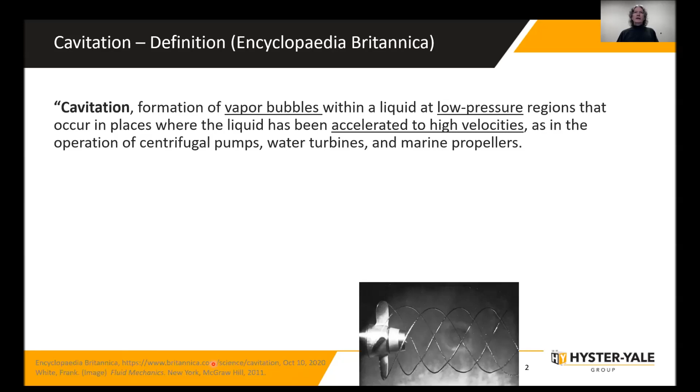So cavitation frequently gets a bad rap. Sometimes that's deserved, but a lot of times it's not. In fact, if we look at the complete definition from Encyclopedia Britannica, they come out directly and say it is undesirable because it produces extensive erosion of the rotating blades. It creates noise, vibration, reduction in performance, and it can do that. But to just say it's undesirable in general seems a little harsh to me. So in this presentation, I hope to show you some of those undesirable things, but also where it can be really fascinating. And sometimes even life depends on it.

This is an important sentence here. Cavitation forms when the pressure of the liquid has been reduced to its vapor pressure, typically isothermally. So I'm not going to go into the whole definition. You can look it up. It is Encyclopedia Britannica, and I really don't like that they state that, but they do.

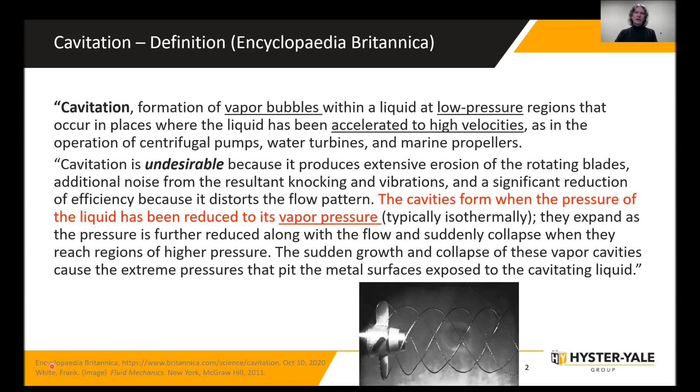So vapor pressure. I'm going to use water frequently in this presentation because, well, we all know what water is and we deal with it every day. So to create a vapor bubble, there are a couple different ways of doing it. And basically what you have to do is you have to cross this line here. And you can see it's dependent on temperature. So if you're above this line in this white area, you have a liquid. And as soon as you cross over into this gray area, you turn into a gas. And then as soon as you travel back across that line, increase the pressure, it turns back into a liquid. So there are a couple ways of doing that.

Just a couple background things here. As a reference point, all of my pressures here tonight are probably going to be in absolute pressure. The pressure that's surrounding us in PSI would be 14.7 PSI, but we're at 101 kilopascals, which is located here. That's all that air that's pushing down on us at sea level. And as another reference point, if we were to drive up to like 6,000 feet, to Timberline Lodge on Mount Hood, we have a lot less air. We have 6,000 feet less air, and the atmospheric pressure drops to about 80 kilopascals. Just kind of as a reference point, and some of that will come up a little bit later as well.

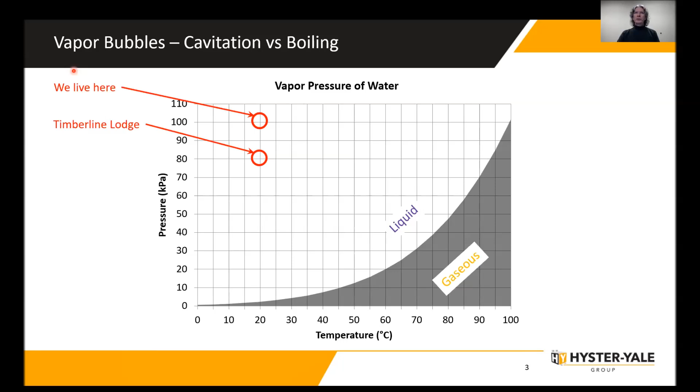So a vapor bubble is when you turn from a liquid to a gas, and there are two ways of doing that, one with cavitation, the other with boiling. And either way, you end up with a vapor bubble. So the most common way, and I think everybody knows how to do this, if we want to boil water and get a vapor bubble, we take our pot of water here and we start elevating the temperature, and we just keep adding more and more energy to it. The heat rises until you get to this 212 Fahrenheit or 100 degrees C.

As soon as you cross over that line, you get a bubble, and that's that steam bubble that rises up through the liquid. It reaches the top, it pops, it then cools off in the air, it turns into a vapor in a large area, and you have all these little particles. That's the stuff you can see. You can't actually see the vapor bubble itself. You can't see steam. Steam is invisible. But what you see rising up is the condensed version of that, condensed in the air, kind of like a cloud. So again, if you were up at Timberline Lodge, you would boil your water at about 93, 94 degrees Celsius. So that's how you can create a vapor bubble with boiling water.

But what we're going to do in cavitation is we're not going to add heat. We're going to decrease the pressure. And we have to, from wherever we're starting, decrease it all the way down to that line and cross over that line. And what happens when you cross back is that vapor bubble collapses. Unlike the boiling water, where it travels up through really hot water, that vapor bubble can stay and then be exposed to the air. Here we're in a cool liquid, so as soon as we come across, that vapor bubble will collapse.

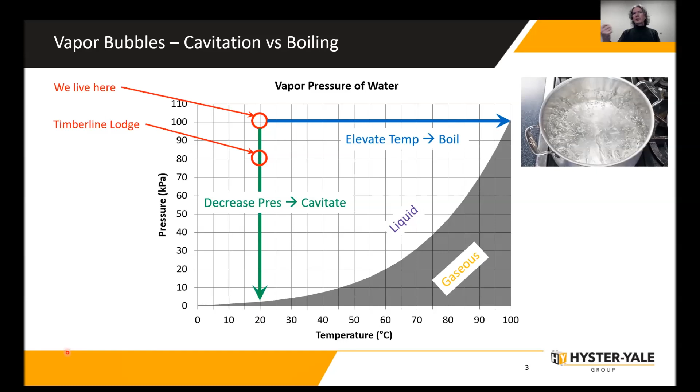What happens if, let's say, we're out here at 60 kilopascals and 60 degrees C? If we raise the temperature, I'd call it boiling. If you lower the pressure, I'd call it cavitating. If you were doing both, I'd say you're trying to split hairs. It really doesn't matter. You're creating a vapor bubble. It doesn't matter which way you get to it. But typically with boiling, you're adding heat, and with cavitating, you're decreasing the pressure.

This is just a funny little thing. This is a Mr. Bean cartoon. So he's making a pasta dinner. These are not his words. These are my words. And I found back in my single days when I was dating, people who said things like this really didn't get very many second dates. And I happened to have a young woman over one night who was a food scientist. And I made this comment because we were having pasta for dinner, and she rolled her eyes up into the back of her head. And I kind of thought, well, there goes that.

You know, that date's not going to last very long. But she stayed. We finished our dinner. We went and we had dessert. I'm a big ice cream fan. I think anybody in my family will agree with that.

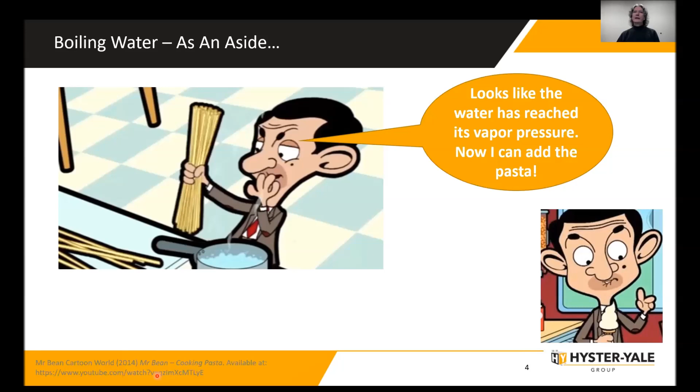And so we get the ice cream out. And as we start the ice cream, this young food scientist came back with, don't eat that too fast or you might get sphenopalatine ganglio something or other. This is the technical term for a brain freeze or an ice cream headache. So I kind of knew I met my match. And it wasn't very long after that we got married.

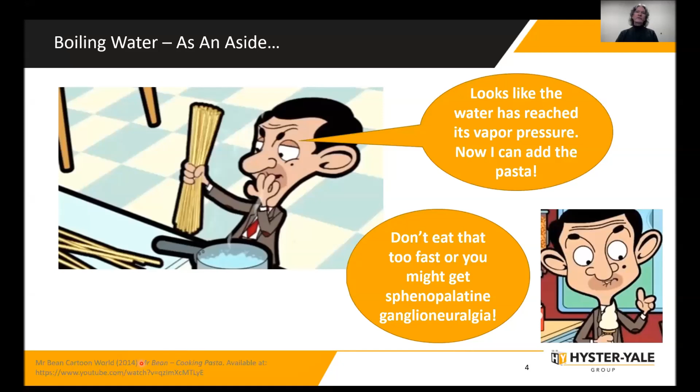So a little bit of history, some great names in cavitation, and I'm really just going to focus on some of the early ones and some of the big predominant people. Mr. Torricelli, he was working for Galileo, and they were working on suction pumps. And this is the same Galileo that was looking up at the stars. Quite the Renaissance person back then.

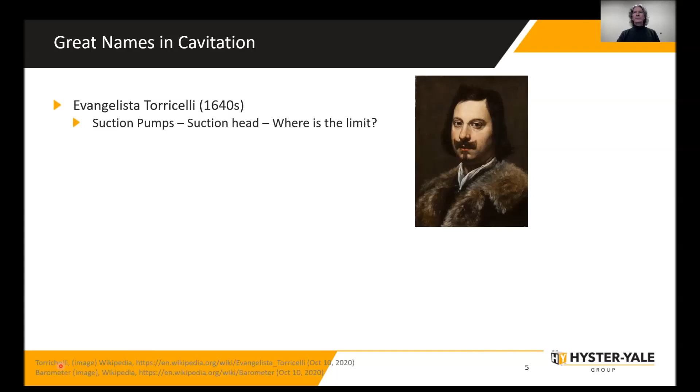So they were trying to develop these suction pumps and trying to figure out the suction head. So if you have your pump at one location, how much suction head, how far can you lift that water? And they were trying to find out what the limit was on that. So Torricelli came up with an experiment where he took a glass tube, he filled it with water, he capped it at one end, and he started raising it up on the outside of his house.

And he noticed the funny thing, at about 10.5 meters high, something happened and a bubble appeared. And he didn't really know where that bubble came from. He kept raising the tube up higher and the bubble stayed at 10.5 meters high. And then he lowered it down. When he got below 10.5 meters, that bubble just disappeared. So he was really curious about what this bubble was. Where did it come from? Where did it go? That sort of thing. And he was doing some research on that.

And basically what he found, he didn't have terms for it back then, he found a non-inertial cavitation. So this is where you can cavitate things without using that high velocity. He didn't have any velocity at all, but he did have cavitation. So as he's doing his research on this glass tube on the outside of his house, he noticed that that 10.5 meters wasn't always consistent. He noticed that it started to fluctuate.

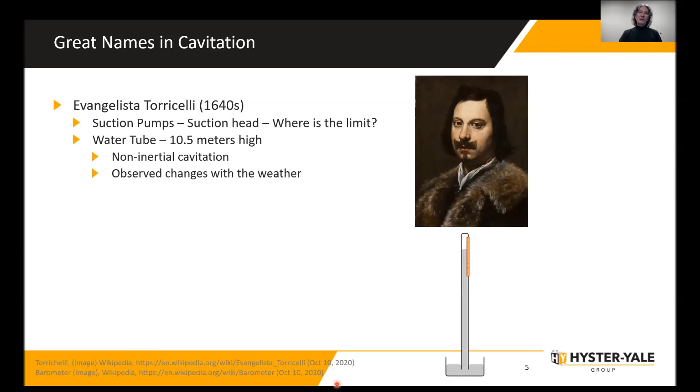And then as he's writing all his data down, he's noticing that it's starting to fluctuate based on the weather. And he could start to sort of predict what the weather was going to be for the day. And being the 1640s, if you're predicting the weather, it can really only mean one thing, and you must be a witch. So he started hearing rumors. He really didn't like the idea of what happened to witches in the 1640s. So smart guy, he quickly dismantled this thing and packed it all up and took it inside.

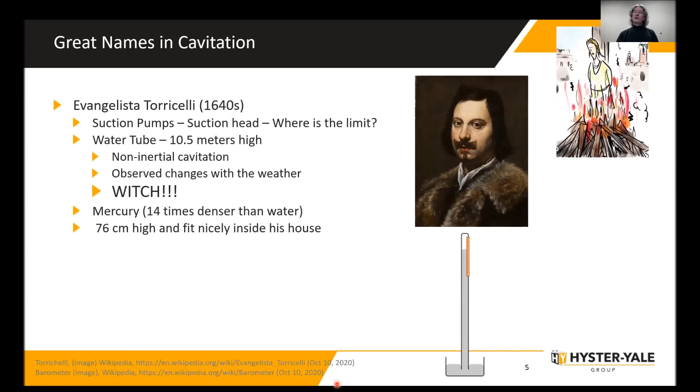But not to be dismayed, he continued on with his research, looked at mercury, and found that in less than a meter high, he could do the same thing with mercury because it's so dense. He could also do it in his house with his curtains closed so his nosy neighbors couldn't look in. And he essentially invented the first barometer. So this is a mercury barometer, for measuring the atmospheric pressure, and that's really what he was reading here and noticing in the changes in the weather.

And that has become the standard of reading atmospheric pressure for centuries, basically from the 1650s, really up until about 50 years ago. And it's still really kind of used today. This barometer that's shown here in the lower right is just the top portion of it. The rest is down below.

But this is one that my grandmother gave to me. She had it, and when I was young and visiting her, I was fascinated by all these little gradations on here. What does this mean? And how does this thing work? And what's it doing? And how do you measure things? And I was adjusting it every day to see how much of a change there was. And as she got older, she gifted it to me. So it was really nice to be able to get that from her. It's a nice fond memory. She was a very technical person, should have been an engineer, just had really bad timing.

So the kilopascals, the Pascal in here, Pascal was a friend of Torricelli. And they took this mercury barometer and started hiking around. I imagine they're hiking in the Alps because they're Italian and French, if I remember correctly. So I'm assuming they're hiking around the Alps, and they started measuring the atmospheric pressure based on elevation. So, similar to what I showed before with Timberline Lodge.

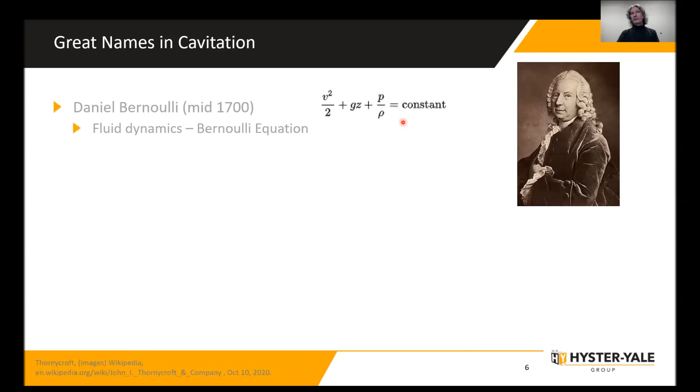He also had a friend, or at least an associate, Euler, who speculated about flow-induced cavitation. Now, he didn't actually achieve it, but he speculated. And my guess is that he was looking at Bernoulli's equation. He knows there's a constant on this side. We're dealing with water. The density doesn't change. This is a height and a gravitational constant. Those are both constants, so those don't change. So I have two variables. And based off of Torricelli, if I get down to the point where I can cavitate, I get the pressure low enough. To get that to drop, I need to increase my velocity.

So he did a lot of speculating. I never get credit for the speculating I do. I do a lot of speculation myself, but he gets credit for at least thinking about flow-induced cavitation. And we'll throw a little nod to Bernoulli.

The other thing I'll mention here is I really want to highlight that this is Daniel Bernoulli. The Bernoulli family was a very mathematical family. He had two brothers who were both in calculus, and I think one of them was in economics, but very tied to math. His father as well is somewhat famous, and I think he had a couple of uncles who also did things in other areas. So the Bernoullis were very influential.

The other thing, Daniel and his father entered a scientific contest in Paris. They entered it separately, and they tied for first place. They entered it in two different categories or something, but they tied for first place. Now, if I entered any kind of contest with my daughter, I'd be really ecstatic if we tied for first place. That'd be quite exciting for me. Daniel's father didn't really see it that way. He was actually quite ashamed that anybody would even compare his son to him, to the point where he never let Daniel into his house for the rest of his life. So a little bit of weird family dynamics there.

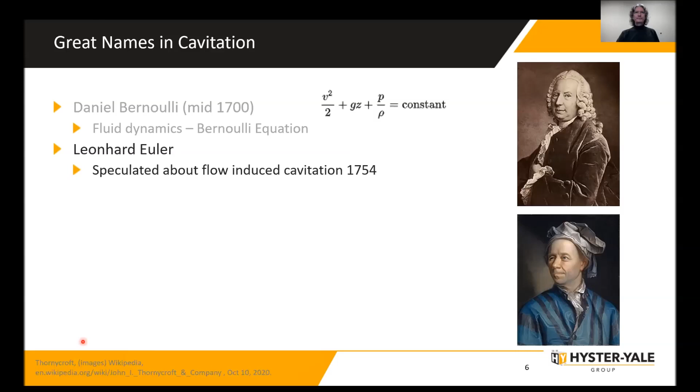So moving on a little while in time, we come up with John Thornycroft and Sydney Barnaby. Now, John Thornycroft owned a boat building and torpedo building company in England, and there's still some version of the company around today. His right-hand guy was Sydney Barnaby. Barnaby was his researcher, his designer, his engineer, and he was also a great writer. And in fact, you can still find his books on Amazon or at Powell's. So you can still find his writings today.

But what they were doing is they were trying to get their torpedoes and their ships to run faster. So they were looking at the propeller design. And they noticed on the back side of the propellers these little bubbles that were forming and collapsing. And they were kind of curious, as I was, what those were. And probably because of Barnaby's work, because he was the main research person behind it, he started looking into it more and more. And he's the one who created the term cavitation. And cavitation just meaning cavity and at intervals, because he saw these bubbles forming and then collapsing right away.

So there have been a lot of other people who have been influential in cavitation. These are just some of the early ones. A lot of it now is done in academia, not to discredit that. But again, just some of the early people that were involved in this.

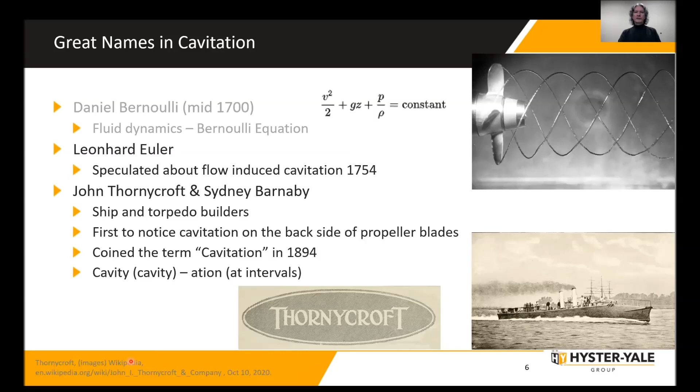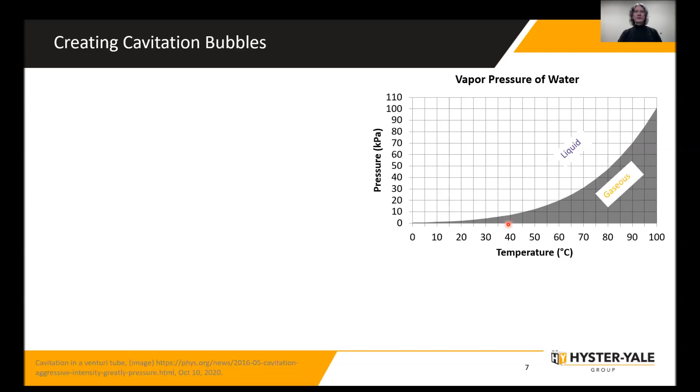So how do we create a vapor bubble, a cavitation bubble? Again, we need to drop the pressure to go below this line and turn into a gas. So what are some of the ways of doing that? We talked about Bernoulli before, and Euler was right. You increase the velocity to a point where your pressure just keeps going down farther and farther and farther, and you cross over that line and you create a vapor bubble.

Another way to do it is with a vortex. Now this is a bit of a combination. It is flow based, and you can use some of Bernoulli's equation there, but also as you have a vortex, things are spinning and they want to accelerate outward. And it creates a very low pressure in the center. That's even true in tornadoes. The center of tornadoes are incredibly low pressures.

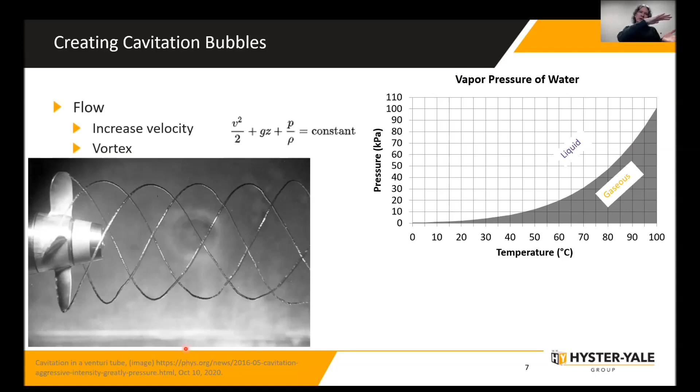So here's a picture. This is a very common picture that you'll find in fluid dynamics books. It's a very beautiful picture, at least to me, but it's also a very hard picture to create. This picture is created in a flow tunnel. So they actually have a very controlled flow rate of liquid coming at a really laminar flow across this area. The propeller is rotating, but it's stationary. And that allows them to really make sure they control the flow rate to just the right precise amount. It's also a specially designed propeller so that it kicks off a very large vortex.

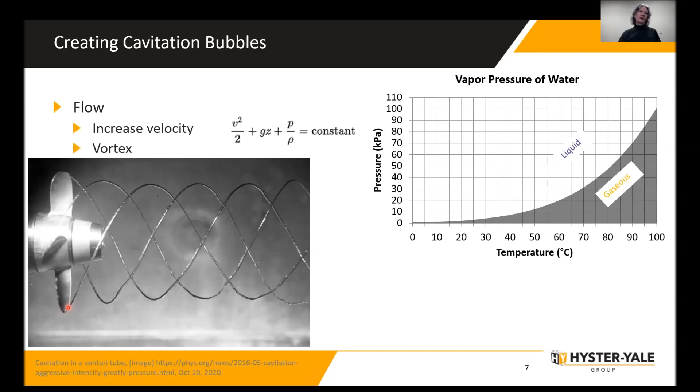What happens here is the vortex is created and it doesn't dissipate. Again, you see that in tornadoes. They take a long time to dissipate, and that's true with vortexes. So it takes a long time for that to dissipate, and they have set this up so that it starts to break up and the cavitation collapses somewhere after this film. But it is a very beautiful picture, but it's also not a very real world example. Typically, what Barnaby would find is the bubbles would form and collapse right in the area of the tip of the propeller.

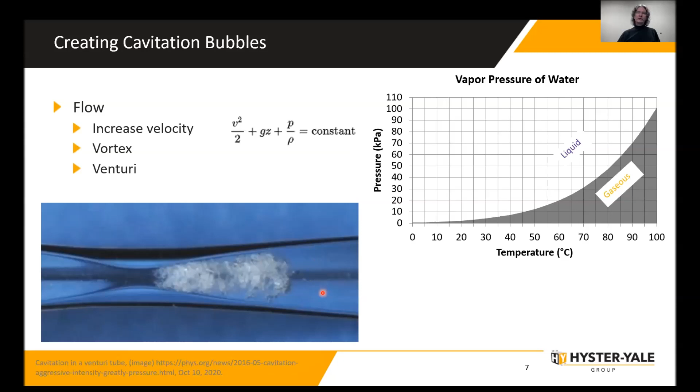Now you'll see it's a very small diameter here, and the bubbles are created, but you can see out here the diameter is actually still pretty large. And the reason is these bubbles are really taking up a lot of space. So even though it has increased to a large diameter, I've got all these little gas bubbles in here, which are just kind of clogging things up. That's some of the efficiency problems that we talked about earlier. But at a certain point, the pressures increase and you go back above the vapor pressure line, and then all the bubbles collapse, and you're back into the full liquid state.

So you can pull a vacuum, as in the barometer. You don't need flow, you just pull a vacuum, you keep lowering the pressure farther and farther as you go up. So a barometer is a good example there. Or you could combine a vacuum with flow. Again, if we were starting at atmospheric conditions, you see this is a very long way to go.

It's a large delta. So let's say we're sucking something into a pump, starting at atmospheric conditions, and we put a flow restriction in. Let's say we start throwing a whole bunch of things in the way. We throw in an orifice or a filter or sharp bends, things like that. It'll decrease the pressure coming into the pump. And now if I'm down in this area, the delta is much smaller, so you'd need a much smaller change in your velocity to the point where you can cavitate. So kind of a combination of things here.

The other one, heat. You can see by the curve, the higher the temperature, the easier it is to cavitate, the smaller that delta will be. If you had enough heat, we're just boiling the water. But yeah, if you go out to 80 degrees, then your delta is probably half of what that is at atmospheric conditions.

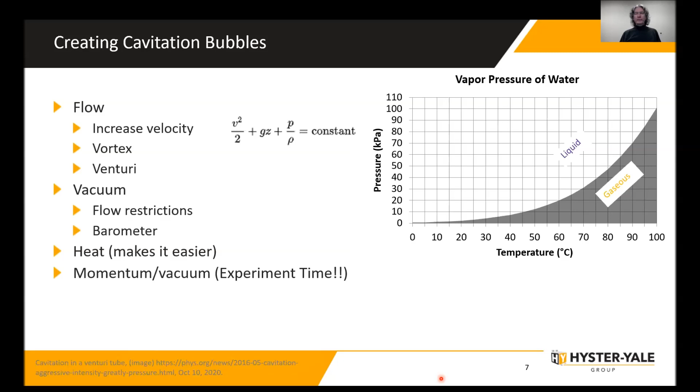Okay, momentum. Momentum's really vacuum, but it's really just a segue to an experiment that I've got. And what we have here is a cavitation tube. This is just a clear plastic tube. There's a plug at the bottom. It's filled with water. It's 4 feet high, and I'll cap the top eventually just so it doesn't spill out.

What I'm going to do with this tube, and I'll show you the experiment, and I've got a little video afterwards because it's actually kind of hard to see in the video or live. It's much better if you're in person because it happens so quickly. You may not see it because of web speeds and all things like that, but it's still pretty tricky to do. So what are some things that I can do to make it easier?

Again, we're going to start at this location because we're pretty close to sea level, and I'm at room temperature. So we've got to drop down all the way to roughly 2.6 kilopascal. So that's a long ways to go. So some things I can do, I can add heat to it. I could use hot water and I could have a much smaller delta. That would work, but I'm not going to use that.

I could get somebody with faster twitch muscles than me to really shake this thing up and pull it down quickly. But we're in COVID. I can't have anybody else come in to the office tonight. So it's just me.

I used to work in the paint industry. I happen to know methyl ethyl ketone, MEK, is at about 10 kilopascals, acetone's at about 25. So those would definitely benefit me. It would give me a smaller delta. Those are both really nasty chemicals, and I don't want to mess around with them, so I'm going to stick with water. The other thing I can do is add a vacuum, and that's actually what I'm going to do.

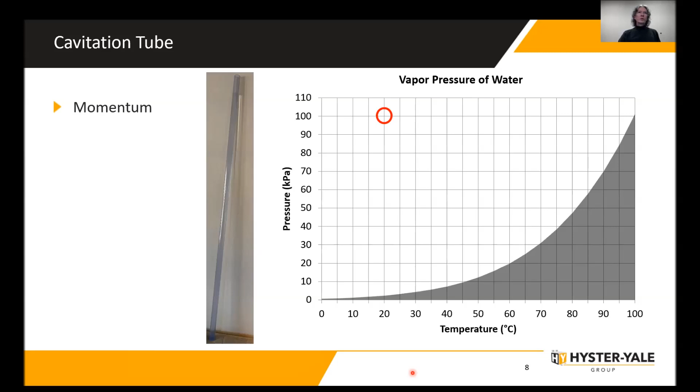So I'm going to take my little VacuVin here. This is just from one of those wine saver kits, and put it in the top. And what I found experimentally is I can drop the pressure to about 60 kPa. Okay, so I'm going to switch over here. Now you should just be able to see me. And I have my cavitation tube here and my little VacuVin. So I'll just go ahead and pull the air out of that.

You can see there's water to the top, and this is a fairly long stick. It's 4 feet long. There's a little plug at the bottom there. Now, again, you may not be able to see what truly happens in this. I hope you can, but probably not. But I do have a video on it. You will hear a cracking sound, and I'll describe what's happening there. So here we go.

So I understand that that is really fast. That's kind of the world of cavitation. But I do have a slow motion video. Okay, here we go. And if you listen carefully, you can hear that cracking sound. So that's what's happening every time I crack that. And I'll go through it real quickly here.

So what I do is I raise the tube up. At a certain point, I start to lower the tube. And you can see these bubbles starting to form right in this area, because the momentum of the water keeps wanting to have the water go up, but it has no choice but to be pulled down. So the water in here, the pressure drops to the point where it goes below the vapor pressure. Keep pulling it down, and you can see that the vapor pocket, the vapor bubble, is actually quite large.

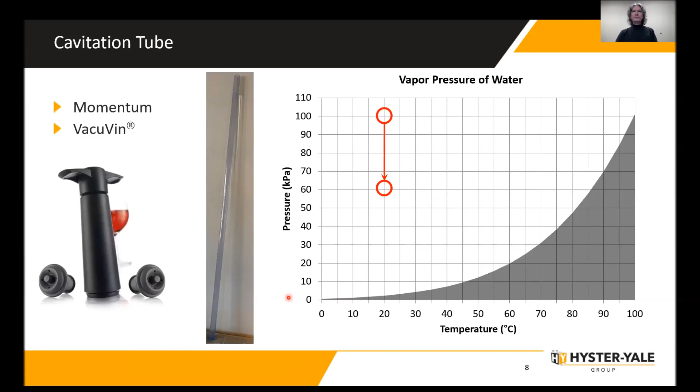Okay, so we know how to create bubbles. Now, what happens when they collapse? Now, typically the bubbles won't be as big as in the cavitation tube, but when that bubble collapses, it collapses with such force and so quickly that it creates very, very localized pressures in the order of 100,000 psi, or almost 700,000 kilopascals. Incredibly high pressures.

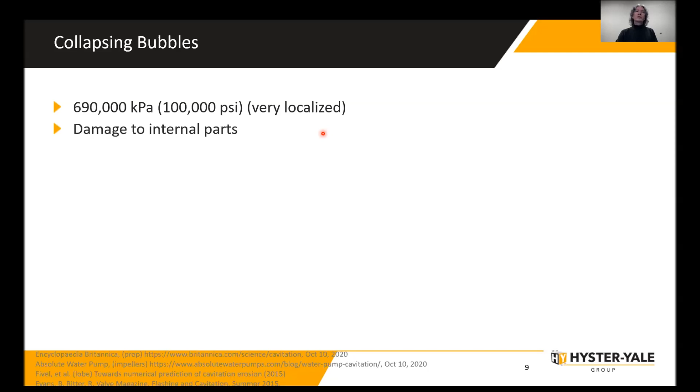So those also tend to form at cracks or things like that on surfaces. And it can do damage. I mean, if you repeatedly had that bubble collapsing at 100,000 psi at the same location, it's definitely going to cause problems. And to give you some examples, here's some parts.

Don't assume if you can't hear the noise that you don't have cavitation, because you still can. It's not super subtle. You can hear it, but if you had a lot of background noise, that background noise might cover it up. It can also throw things off balance. You have a gas as opposed to a liquid then that you're trying to pump. So it can throw things off balance, causing premature bearing failure and greatly decrease your efficiencies.

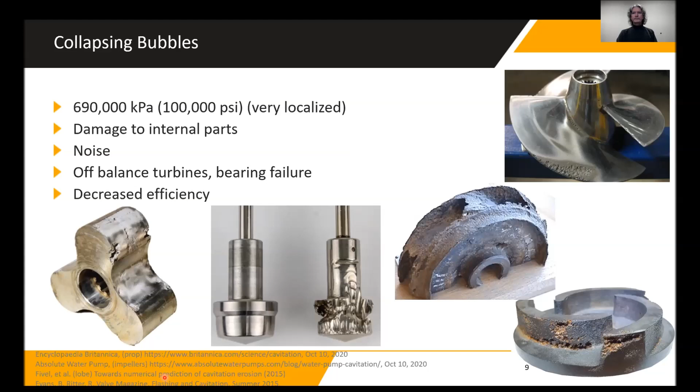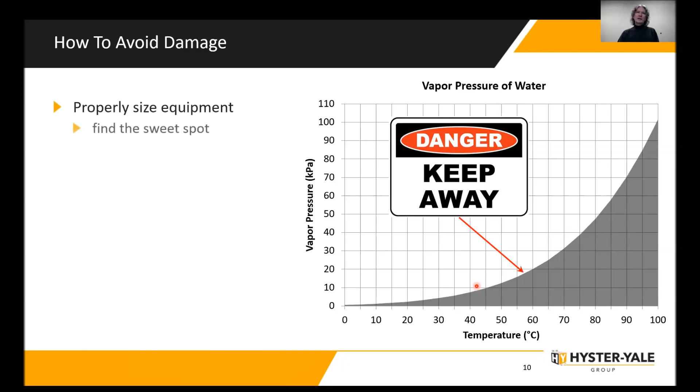You definitely want to properly size your equipment, especially when you're talking about pumps and filters and things like that, solenoid valves or regulating valves of any kind. Definitely properly size it. You kind of want to find that sweet spot. And the example I'll use here is, let's say you have 100 psi of water coming in and you have a pressure regulator and you want to regulate your pressure down to 40 psi.

Don't buy a 0 to 40 psi regulator. Buy a 20 to 60 psi range, because that way you're running in the middle. You're not running on that hairy edge. When you're on that hairy edge, bad things can happen. So you want to find the sweet spot of whatever that pump or the filter or valve or whatever that is. Run some hand calculations.

I do have an example of this coming up. We've got Bernoulli's equation or other things that you can use to run some hand calculations to see what your pressures are, see if you come anywhere close to that.

Another great way, and my personal favorite, I love doing computational fluid dynamics, CFD. This is analytical modeling of fluid flow. You can really get pretty advanced here. You can even model the phase change. So you have a liquid phase and you change into a gaseous phase, and then it changes back. You can model all of that.

But I say the easy stuff, and I don't mean CFD is easy. I mean, just model a single phase. Model it as an incompressible fluid. Model it as just water. Don't change into a gas. Go ahead and run your analysis. See what your lowest pressure is. And if you're anywhere near this line or below it, redesign your thing to make sure you're farther away from that. Somebody one time asked me, well, how far away from it should you be?

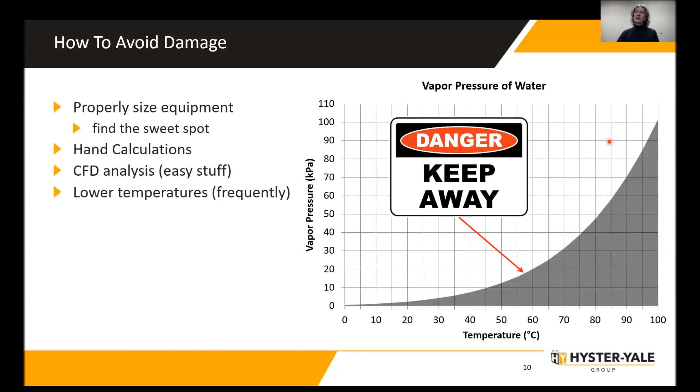You can lower the temperature. If you've got a really warm liquid like water and it's really warm here, lower the temperature if it's possible, because you can see then that delta goes from being fairly small to fairly large. That's one way to do it. I will say frequently here. That's most of the time what's true. But sometimes you actually want to raise the temperature.

In this case, you want to think of like a really thick, gooey liquid, like an oil or a grease or something, or molasses in January type of thing. It doesn't flow real well. If you're trying to pump it and the pump's having to work really hard, you can get incredibly low pressures from that. But if you were to warm it up and decrease the viscosity, it's going to pump a lot easier. So it's going to be a balance, and it's going to depend on your liquid. But for raising the temperature, think of those really thick, gooey liquids.

Increasing the localized pressure. Again, if you've got an inlet area, what can you do to increase the localized pressure, especially like at the inlet of pumps? You want to remove restrictions in your flows. Get rid of any sharp bends. If you have a sharp 90-degree bend, make it a nice big radius in there so the flow is just gentle going over that. Filtration, that's why they have filters downstream of the pumps, not upstream, especially if your filters start to clog, it can cause a bigger restriction.

Orifices and a vena contracta, these are funny. A vena contracta is if you have a large reservoir and you drill a hole, even a decent sized hole, and you've got a nice square edge on it and you think, oh great, I got a big hole, I'll get a lot of flow through here. What a vena contracta is, is that as the flow is coming into that, it has the ability to recirculate in there, and that recirculation zone is essentially a dead area. It causes a restriction. It can take your flow area and cut it in half without you even knowing it. So definitely take a look at that.

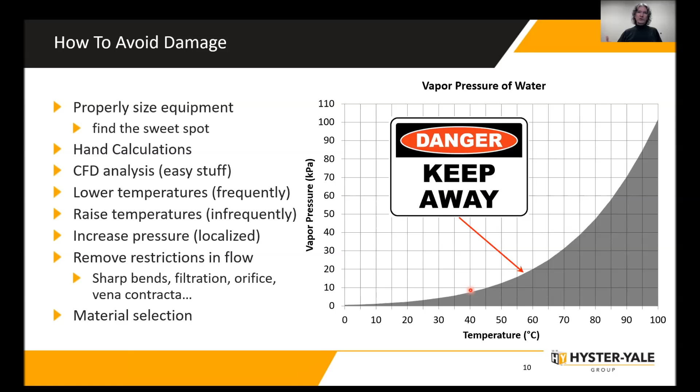And then material selection will become important because you don't want a brittle material where those cavitation bubbles will collapse and really do damage quickly. You want something that can kind of take the pounding. I'm not a material scientist, so I can't really give you a lot of examples on that, but it does make a big difference.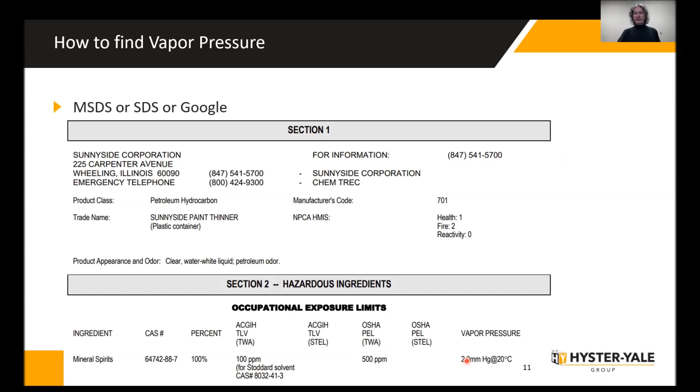This example is of a paint thinner. Again, I used to work in the painting business. Graco made painting equipment. And you find in section 2 the vapor pressure. They're going to give it to you at one point. And it's important here because they're looking at the hazards. And for a lot of these, the hazard is it can spark off. And if you have a vapor, it's easier for that to spark.

So in the SDS sheets, it's now in section 9. And I like these a lot better because not only do you have the vapor pressure, I've got the density, I've got the viscosity, all the stuff these fluids people love. I've got the boiling point.

Now this is a very specific paint, and it's a Sherwin-Williams paint. It is their Duration paint, which is a water-based paint. And that'll be important. And look at the boiling point. I'll mention this again in a second. Look at the boiling point and look at the vapor pressure and know that this is a water-based paint.

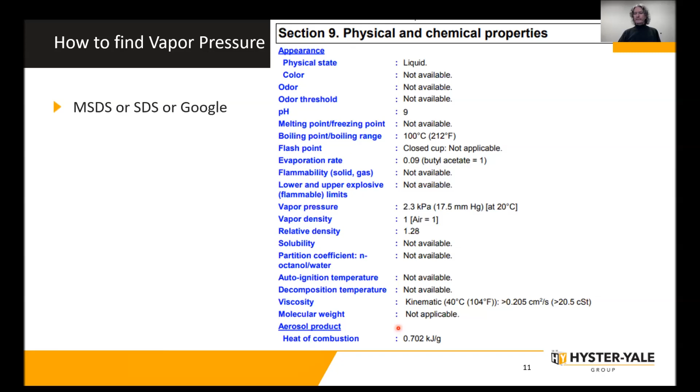The other way, and if you're going to be doing this a lot, ask the supplier. Suppliers love to provide this information, and they will give you more than just a single data point. They'll give you a whole curve. That's definitely true with Sherwin-Williams. When we used to request the data from them, they gave it to you based on temperature, and really gave you all the information. They like to share it because you're using the paint that they're selling, and they want it to really work well in your system, so they'll give you that information.

This is a coolant that we use in our hydrogen fuel cells. Again, this is public information here. This is a very, very low conductivity coolant. And when we requested it, they gave it to us over a very wide range, and they also gave it based on the concentration of the coolant mixed with DI water.

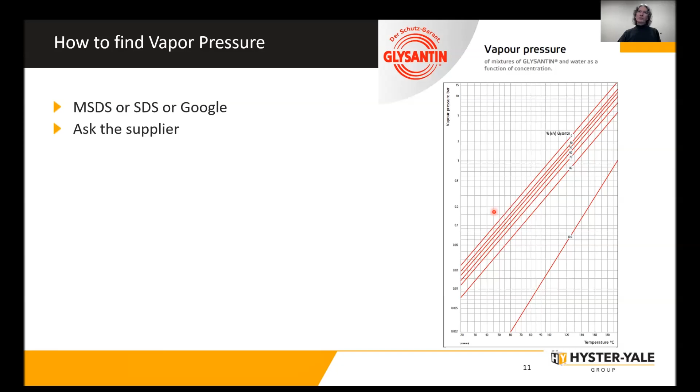And just as an example, coming out of the fuel cell, it's typically going to be 60 degrees C, and we've got a 50% concentration. So we've got a vapor pressure of approximately 0.15 bar. In bar, you can convert over to kilopascals. So that's the vapor pressure. So when we design our systems, we make sure that nowhere in our system do we drop anywhere below that 0.15 bar.

So if you can't find it, review the makeup of it. What's the medium made up of? As the example again, you look at that Sherwin-Williams paint. It's a water-based paint, so the liquid in there is water. So if you really need to and you can't find any other information, give it your best guess. Call it water. If there are two different liquids in there at about the same ratio, use the one that has the higher vapor pressure, because that's the one that's going to cavitate first. Don't use the lower one.

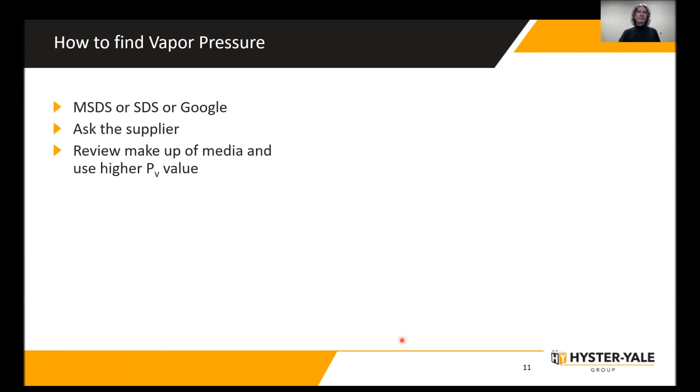Okay, here's an example. At what speed do you start to see cavitation on a torpedo? Now, if there are any torpedo experts out there, this is a really simple example, so cut me some slack. This is a very common problem that you'll find in fluid dynamics books, and this is one version of that.

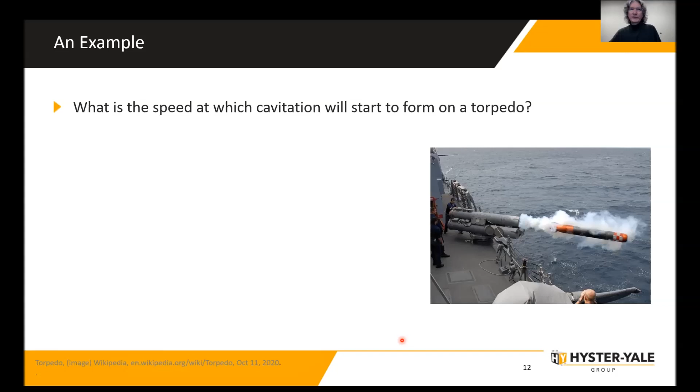So I'm an engineer. I love making assumptions. Let's assume we're going to shoot this torpedo off in salt water. It's going to be about 10 degrees C, and it's going to stay about 1 meter below the surface of the water. And I'm not going to worry about the propeller. I'm really just looking at that casing, so we're going to ignore the propeller.

There's also a really big assumption here. We're going to use Bernoulli's equation because that's a great equation to use. Bernoulli's equation is based off of an ideal fluid. And an ideal fluid is incompressible, which water is. It's laminar, which at these speeds, it's really not. And it's also non-viscous, meaning there's no resistance to it, which doesn't exist. So there really is no such thing as an ideal fluid, and that's what this equation is based off of. So again, that's another assumption that we just have to chalk up.

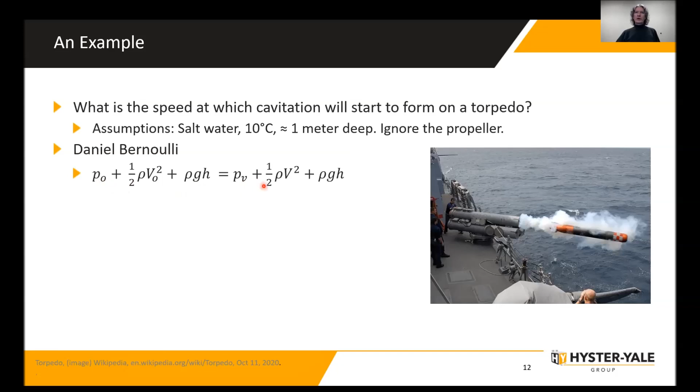So, okay, this is Bernoulli's equation kind of written out, and this is the stagnation side, and this is the side at velocity. Some things we can do immediately: our height is not changing, so we're always going to be 1 meter. So we can just cross that out of the equation. We don't have to worry about that.

And the stagnation velocity is 0. You square 0 and you get 0. You multiply it by anything and you get 0. So we just knock that out of the equation. And we're left with the stagnation pressure, the vapor pressure, density, and a velocity.

So we go and we look up our knowns. We know what the density of water is. I just Googled these. We know what the density of salt water is. 1 meter deep of salt water, the pressure is about 110,000 pascals, and the vapor pressure is 2,290 pascals.

Now you'll see something here. These are in pascals. Everything else I've been doing is in kilopascals. This is important because if you were to use kilopascals, you're going to get the wrong answer. You need to make sure that when you look at these equations that you balance the units to make sure that the units are going to come out correctly.

Some people hate this. Some people love it. I was talking to somebody else and he said he actually loved this when he was in college. Personally, I can't stand it, but you have to do it.

There's no way around it, because if you were to use kilopascals, which is mostly how we write these when we're talking in engineering speak, and when you look the values up, it'll probably say kilopascals. You put kilopascals in here, and again, it's wrong. So, okay, we have our knowns, we have our equation. We rewrite Bernoulli's equation and solve for velocity. Convert that over, and you're at about 34 miles per hour.

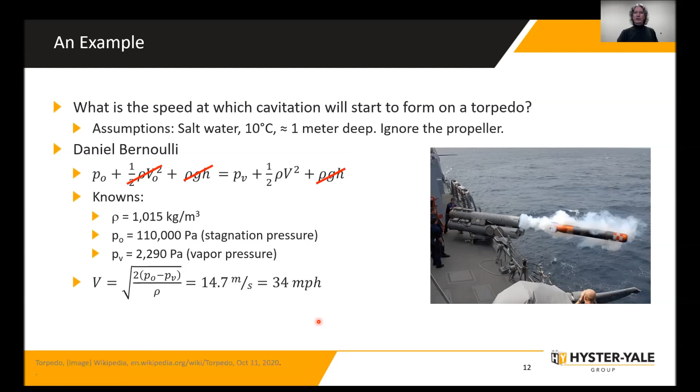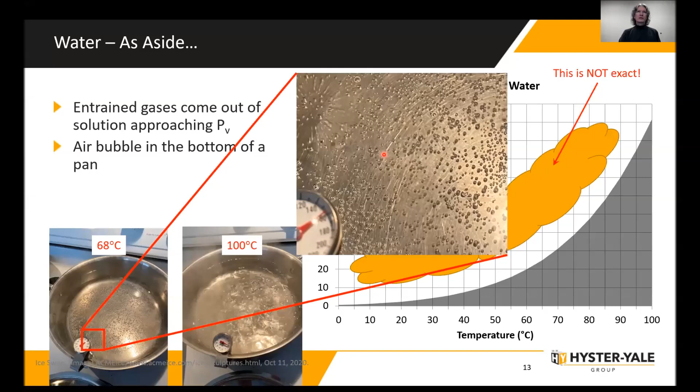So once you're boiling, that's when you get the vapor coming out. So there are people who can benefit from that. One of them are ice carvers. If you want to get that real glass, like that crystal clear ice, they will boil their water. They'll boil it a couple of times, in fact.

And I have as an example here, hopefully I don't drip on my computer, there's a piece of ice where the water has been boiled, and there's one where it hasn't. So you can see if you want that crystal clear ice, that's one of the things that they do to get that nice clear ice for the ice carving.

Another area that will benefit from that are ink companies. So with ink, when they're printing, they don't want these air bubbles to come out. They can't boil it. Water can take a good hearty boiling, and then you cool it back down and you still have water. But if you did that to ink, you'd destroy it.

So what they do is they drop the pressure really low. They don't actually cavitate, but they drop it really low to allow all those gases to come out. They agitate it a little bit. And then once the gases are out, they increase the pressure again and seal it up so the gases can't come back in.

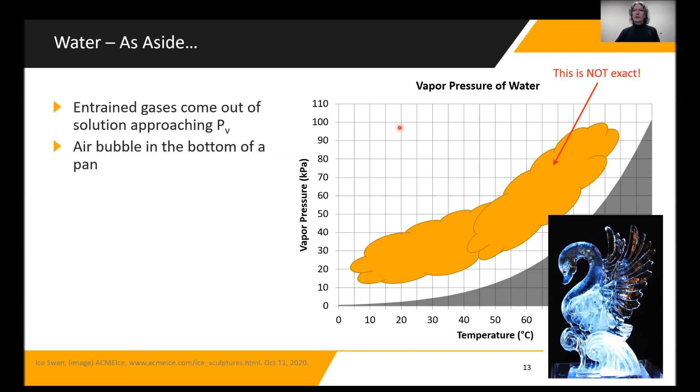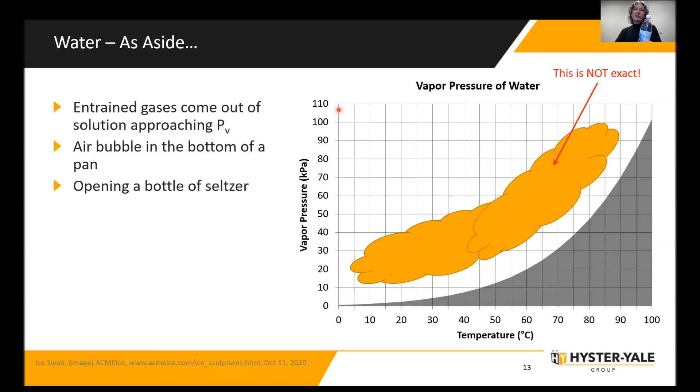Opening a bottle of seltzer. We won't even go down to that real low part, but if you just take a bottle of seltzer, you're at about 300 kPa, and when you open that, all those entrained gases come out, and I just got my computer really wet, sorry about that. So opening a bottle of seltzer, we come down, they've injected all that carbon dioxide into the bottle, and it starts to come out.

So big difference here. These are not vapor bubbles. They're not steam bubbles. They are air bubbles or some sort of gas, but mostly air. A big difference here, they don't collapse, they pop. So they rise to the top of the surface, they sit there, and then they pop. A cavitation bubble is going to collapse in on itself, and that doesn't happen with the air bubbles.

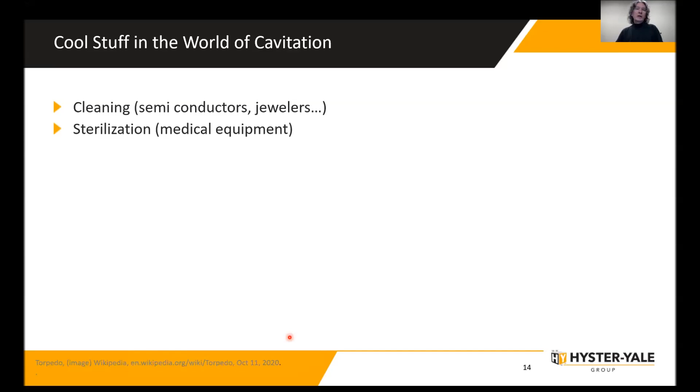They can dip things into a liquid, they blast it with ultrasound, and when those ultrasonic waves hit the part, they actually are able to create little tiny cavitation bubbles on the surfaces. And as those bubbles form and collapse, they send out shock waves, and if you've got a piece of debris, it has the ability to blow it off.

I was at my mother-in-law's. She had one of these, and we all threw our jewelry in, and she was all excited about it because you pull out your rings and everything, and they're nice and pretty and clean. So I described what was happening, and they just sort of rolled their eyes at me, but it was fun. I think they actually enjoyed it too.

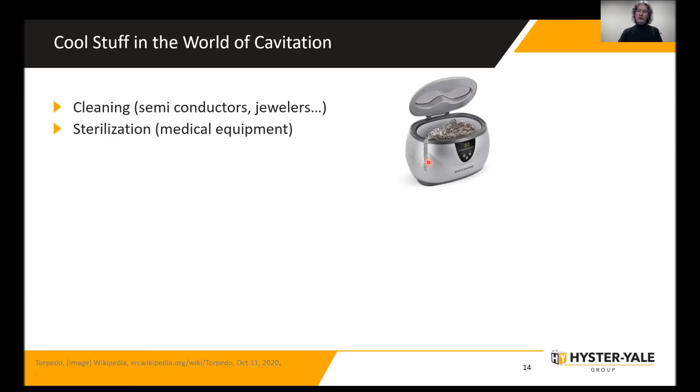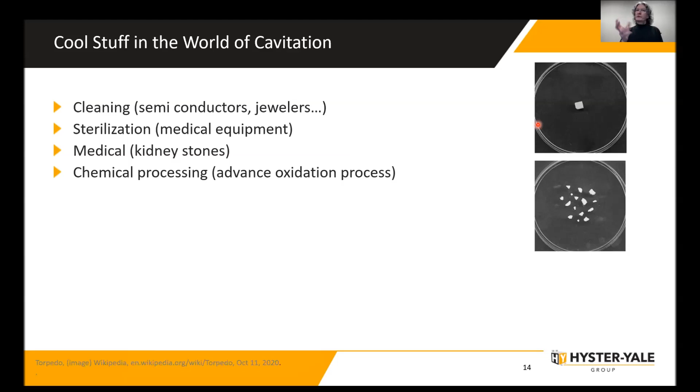Now, I'm not a chemist, but apparently you can somehow benefit from advancing the oxidation process. You saw that on some of the cast impellers where you saw rust forming, so it does advance the oxidation. All right, pistol shrimp. These guys are really cool. There are a mess of these off the coast of Oregon.

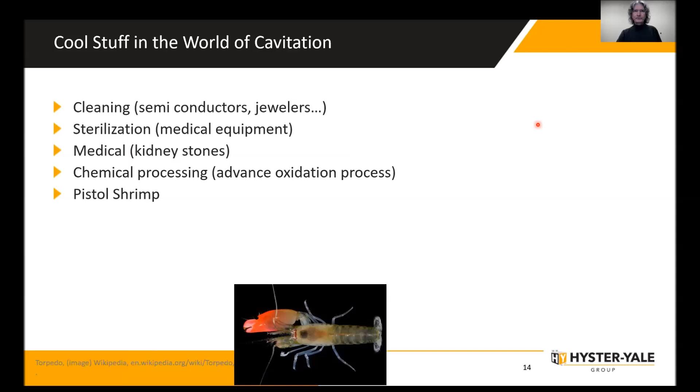So what a pistol shrimp does, look at that claw. Isn't that huge? I mean, he's clearly right-handed or right-clawed. But what he does is he cocks this little claw back. And when he cocks it back inside the main part of the shell, there's a cavity in here. That cavity fills with liquid. And then there's a plunger.

And when he slams this thing down, let's say he waits for a little fish or crab or something else to swim by. And he slams this thing down, and he slams it so hard that the water shoots out. And the water going that fast, the pressure drops to the point where it drops below the vapor pressure, and he gets a cavitation bubble.

If you have the chance, if you can find it, NPR had a really good article on pistol shrimp, and they talked about specifically off the coast of Oregon, and it was really fascinating to hear. It was, I don't know, it was like a 15-minute

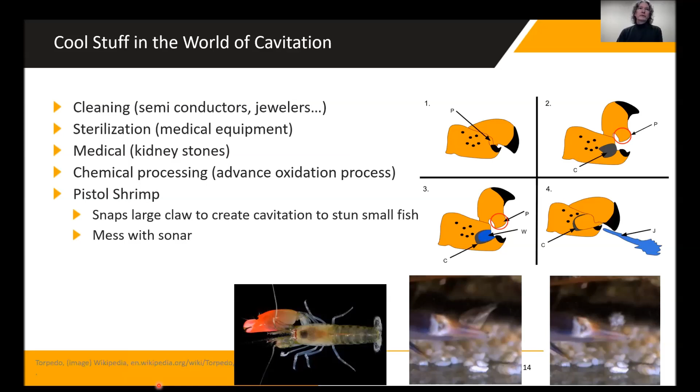description of these guys. There's also a shark called a thresher shark, whose tail is about the same size as his body, or maybe even longer. And he uses that. He swims up to a school of fish and he actually snaps his tail. And again, he creates that vapor bubble. And when it collapses, it kills a bunch of the fish in the area, and then he can eat those. So, from the shark and the shrimp point of view, cavitation is really important.

Another interesting area, this is Niagara Falls. And as the water's flowing over, and this is true with a lot of waterfalls, we've got a lot of them around here. But as the water is flowing over, the velocities increase right at the edge to the point where it cavitates, and it can really help with the erosion, just eating away at the rock. Niagara Falls is an example. I looked this one up, can erode at about 1 meter a year, which just is incredible to me.

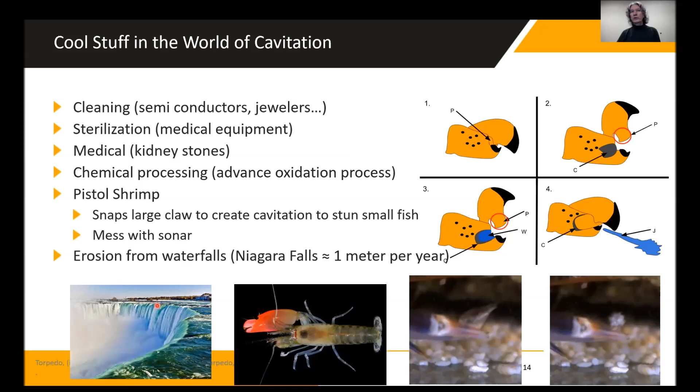If you've never been there, this is standing on the Canadian side, looking around at the Horseshoe Falls. The United States is over here. When I've stood here and you look over, you're right at the edge. And I always want to take a ruler and somehow stick it down, because the depth of the water here has got to be 8 to 12 feet deep. It's just a vast amount of water going over here. So another place that is kind of cool is you get some erosion due to waterfalls. All right, so some super cool stuff in cavitation.

Now, supercavitation is when the vapor bubble totally encompasses the object. And what that does is it just really reduces the skin friction. Stick your hand out the window, driving at 60 miles an hour, and you can feel your hand kind of cuts through pretty nicely. If you do that through water, you can really see the difference, a gas versus a liquid.

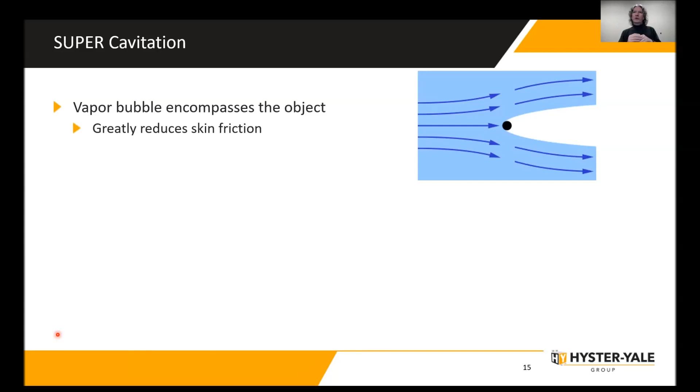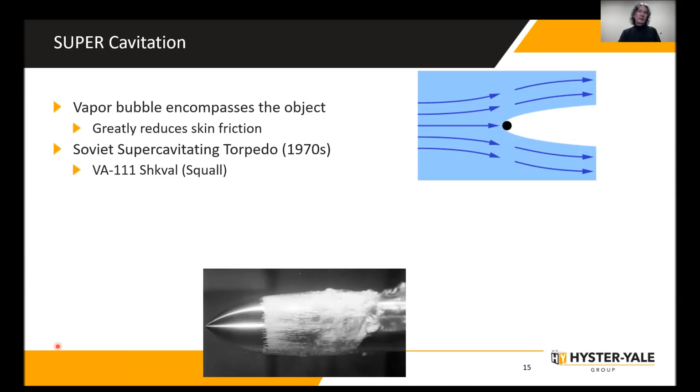So some examples of that, the Soviets in the 1970s decided they'd try to make a torpedo that would supercavitate. And they did succeed, and they called it the VA-111. They did succeed, but they had some problems with the steering. They couldn't get this thing to go very straight, so they didn't really accomplish much, but they did get it to supercavitate.

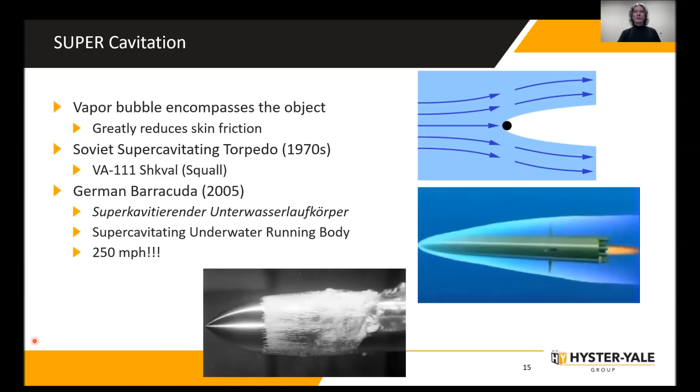Well, not to be outdone, and with 35 years of more technology, the Germans took on that challenge, and they called theirs, and look at this, 2 words, 39 letters, but it's supercavitating underwater running body is what that really means. So they were able to get theirs to work, and they actually got it to be able to steer. Their torpedo is 8 meters long, 0.5 meter in diameter, and it's rocket propelled, and it goes 250 miles an hour underwater. I would not want to be an aircraft carrier with something like that coming at me. So that's some pretty neat stuff.

So putting a few things together, and really this is just for fun. This is when the beer comes in. So my experiment with beer, and I'll show you. If you have seen this, this is not an uncommon barroom trick. If you haven't seen it, it really just means that you have nice friends. But we're going to use beer. I chose Corona in part because, well, it sort of fits the time, with the virus that's going on, but also because it's a clear bottle and we can see what's going on inside.

Let's say you go out with your friends to the bar and you're hanging out with your buddies, and you go up to the bar and you get your beer. And so I got my Corona here, and the bartender gives you your beer, you open it, and you walk back and you're hanging out with your friends. And one of your friends decides it would be really fun to take their bottle and crack the top of yours. And so they have their bottle, and I should hold that up a little bit higher.

Apologize for that. If I need to, I can do it again. Let me do one more, make sure I'm holding it up high enough. That's why you have extra beer, right? Okay, so here we go again. I'm holding it at the right spot.

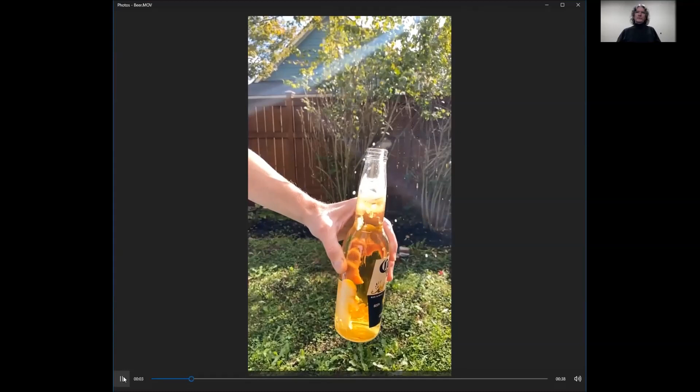So I got my beer, your friend comes along and makes a mess. Okay, so here we go. And then we'll go through what happens. So there your friendly friend comes along and makes a mess. And what really happens at the end is you end up with about 1/3 of the beer that you started with from that one crack, and it's very flat beer. It's really not very good to drink at all.

So here we go. We'll do it slowly. We crack the bottle. All right, now what's happening here? We hit the bottle really hard. Okay, yes, I'm using a rubber mallet. Occasionally, the top of the glass will break if you do it too hard or don't do it just right. So just for safety's sake, I used a rubber mallet. So you crack the top of the bottle.

We take the glass bottle and we accelerate it downward very quickly, kind of like my cavitation tube, where I raised it up and accelerated it down. But by cracking it, I'm just sending it down very fast. And then in the bottom of the bottle, the beer doesn't want to move. So the pressure inside the bottle drops really, really low in here and cavitates. You can hear the cracking sound of it cavitating right after you strike it.

And remember all those entrained gases, all that carbon dioxide in the beer, that wants to come out of suspension and does, because we've really lowered the pressure and also agitated it immensely. And you see that all those gases almost come out all at the same time, overflow, and really just make a total mess. So now, if you see this at a bar, you can tell all your friends how this really works, and you can really show them how much of a geek you really are. But honestly, they probably know that already.

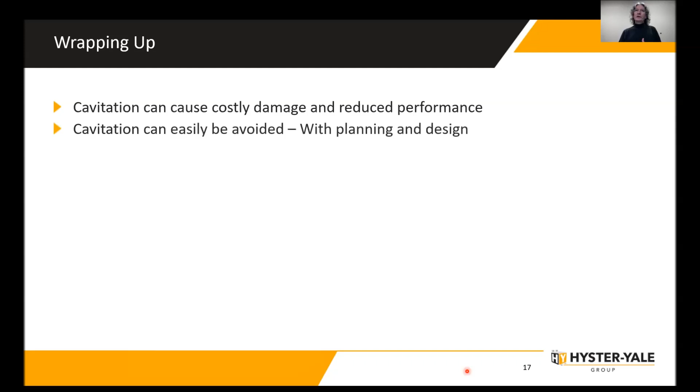Okay, so that's my little beer experiment and how that ties into everything. And okay, so wrapping things up here. So cavitation can be very costly. It can really wreck your performance on your system, but it can also be avoided. And I even say easily avoided. You got to do your homework. You got to do your planning and your design work. Do this up front. Don't wait till the end, because when you wait to the end, that's when you have problems, and that's when you can't do anything about it, and that's when you're stuck.

Cavitation can be very beneficial, life sustaining if you're a pistol shrimp. But it can also really just be a lot of fun. So that's my talk on cavitation. I hope you guys enjoyed it.

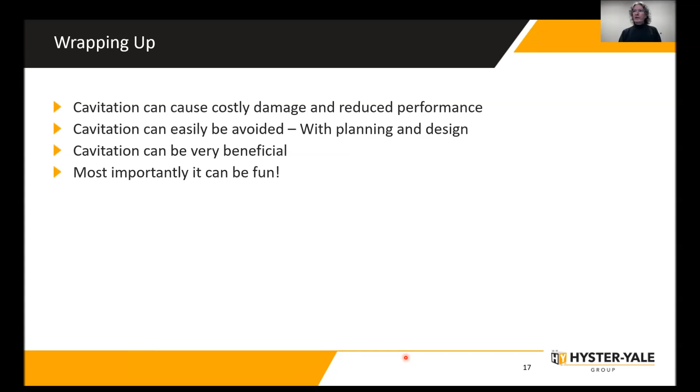Thank you, Pete, for that wonderful talk. I learned quite a number of different things. And I was really struck by one thing that I learned, which was that ice carvers boil their water before they freeze it so that they can make it super crystal clear. I had always just assumed that some of that foggy glass was entrapped air from homogeneous freezing, or not uniform freezing temperatures, et cetera. So that was like a revelation. It's a small thing. It's not technically cavitation, but it was very interesting to me.